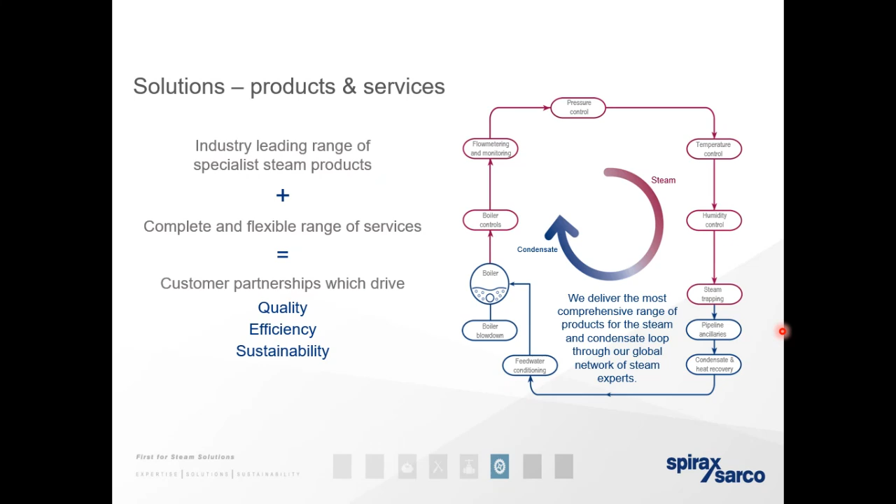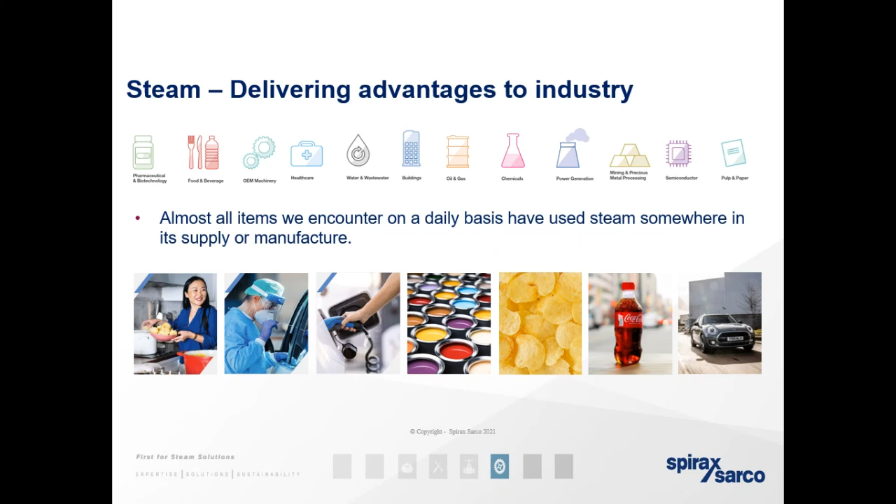Steam delivers advantages to the industry. There are multiple uses for steam in every single industry: pharmaceutical, food and beverage, OEM machinery, healthcare, waterworks, buildings, oil and gas, chemicals, power generation, mining, semiconductors, and pulp and paper. The pictures just represent a slight indication of these industries. Almost all items we encounter on a daily basis have the use of steam somewhere in the supply chain of the manufacturer.

What is wrong with plant steam? Well, nothing for most industrial applications. But plant steam is increasingly becoming unacceptable due to boiler feed chemicals, pipeline scaling, rust and corrosion particles.

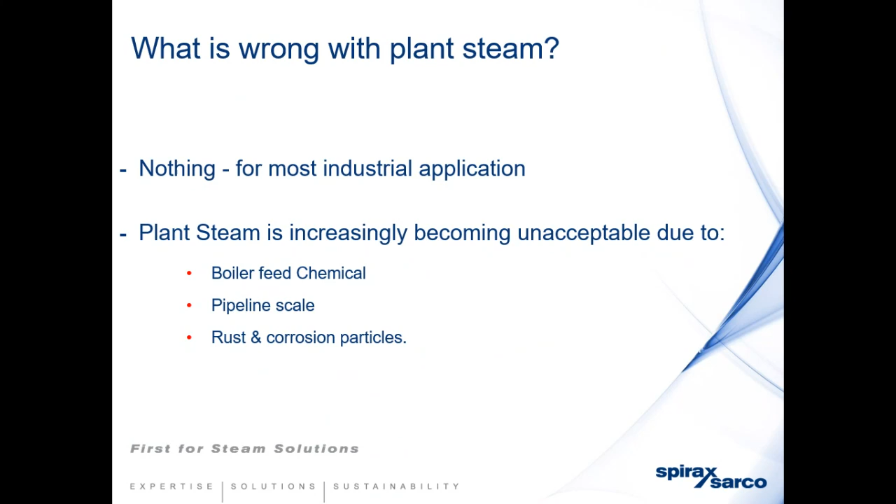It's especially this that we want to talk to you about today, about understanding the quality of the steam and where it's been used in your processes, and why plant steam is used in the processes.

Sorry, I don't know if you can see the pop-up that sits in the middle of the screen. Can you assist me, Francisco? What can we see at the moment? Yes, we can. Can you just close it? I'm trying to, give me a second. Or move it to the one side. There you go. Sorry about that.

Why use steam? It's still the most efficient, cost-effective way of transferring heat in all industries. If you consider the controllability of steam, it's very controllable. The temperature and pressures are related to each other, so it's accurate and repeatable in the operation of your systems.

Steam is a proven sterilizing process. Because of steam's capabilities, it's a very good option for that. Steam fills heat transfer space evenly, ensuring consistent quality because of its controllability. Steam is ideally suited to clean and sterile products and environments as it is inherently sterile.

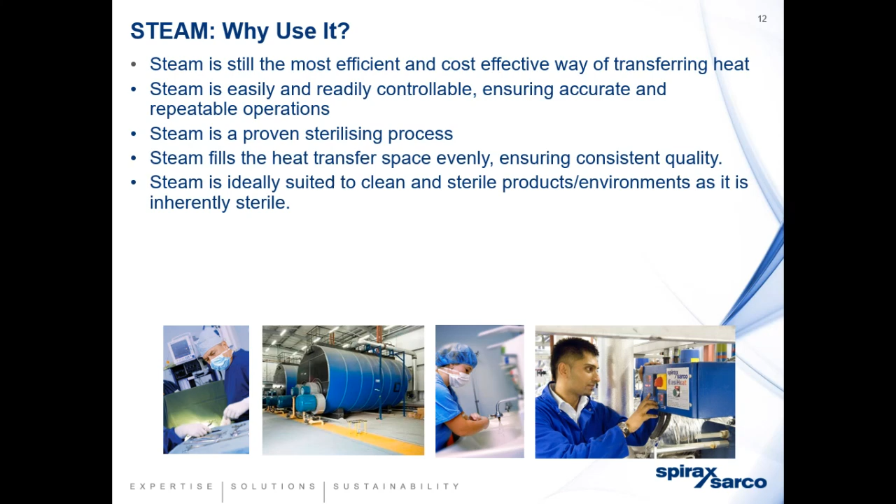Steam is extremely flexible as it can be generated in a central boiler plant or localized boiler, whichever suits the application. That means I can transfer the heat over quite a considerable distance and still be very efficient in getting the necessary heat at the application.

Steam is non-toxic. Due to the qualities of water, it brings a very fast-acting destructive power against microorganisms.

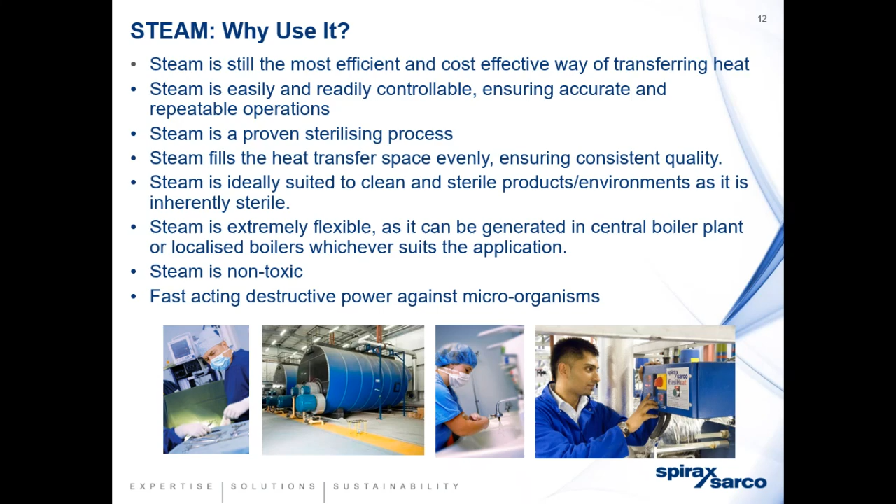We now move to the origin. If you remember the steam boiler loop, the steam loop, we start at the boiler, and that's where it's important to understand what steam you are actually allowing to get to your plant.

What happens in steam boilers? Priming: boiler water being carried and forced from the boiler to the steam and condensate circuit is a problem if it is not understood correctly.

Foaming in the boiler allows unstable water conditions, forming raw water issues, chemical issues, and poor control. In other words, if the pressure drops in the boiler and it operates below the actual design pressure, you are going to get foaming and therefore carryover.

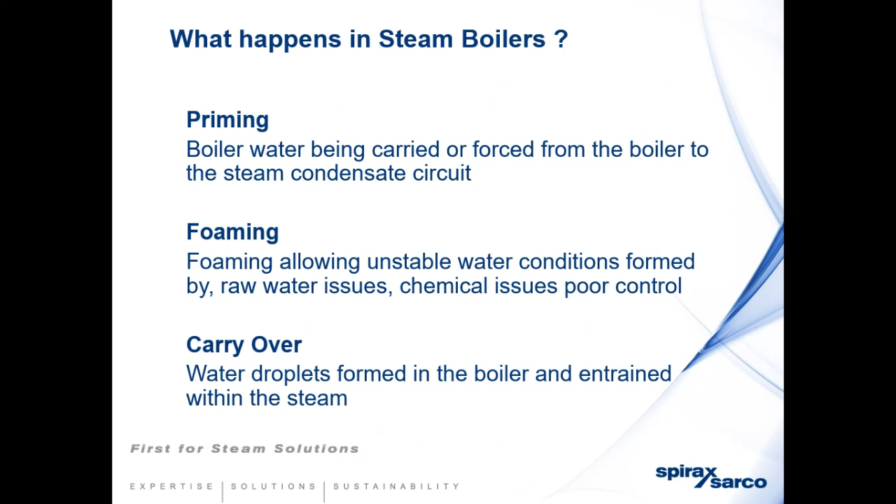That means water droplets formed in a boiler, entrained within the steam, will be drawn into the steam system, which means that the energy you will be carrying to the actual plant where the steam is going to be used will be less than at the saturation point of the steam.

So let's talk about priming. It's a sudden draw of boiler water into the steam takeoff. It's generally due to one or more of the following reasons: incorrect selection, installation or maintenance of raw water pre-treatment plant, operating the boiler with excessive high water levels, operating the boiler below design pressure, or increasing the volume and velocity of the steam released from the water surface.

Sudden excessive steam demand will cause priming to happen.

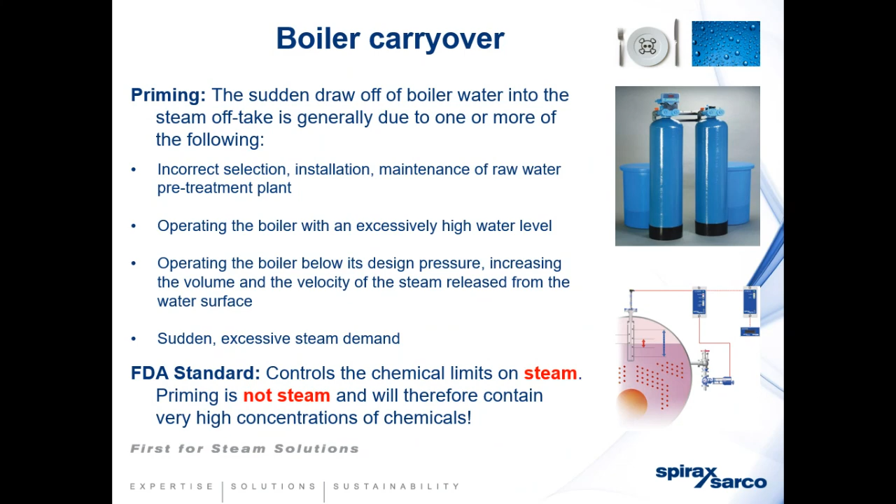And how do we prevent it? FDA standard: control the chemical limits on the steam. Priming is not steam and will therefore contain very high concentrations of chemicals. So understanding the control of your boiler is of utmost importance to start the energy journey.

Plant steam contamination includes volatiles, substances that can be carried over into a gaseous state, chemical substances like mercury, cadmium, lead, chlorines, chlorides, and boiler feed water chemicals, which can cause harm to human health or steam systems, especially if you have direct injection systems in your plant.

Biological contamination, including bacteria, fungi, viruses, and yeast, is present in water sources and controlled by local water authorities, and is of concern in the production of medical devices and products which could bypass the human body's natural defense.

An example: injectables. High temperature of steam will kill most of these, but in doing so can cause harmful pyrogens happening in the system.

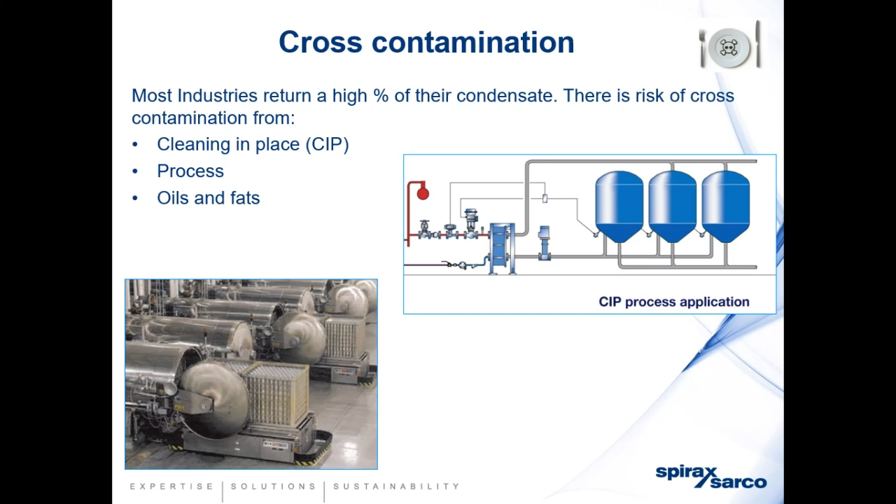Also with your processes, with normal heat exchangers, where gaskets fail on plate heat exchangers, some process chemicals or process elements filter through to your condensate return, and for the same reasons, oil and fats. This all goes back to your boiler, causing cross-contamination.

Here's an example of such a situation.

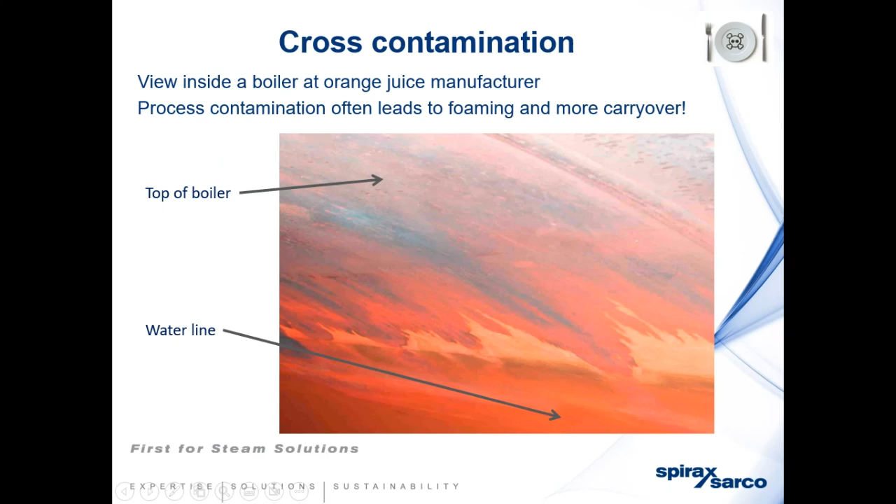This is a view inside a boiler of a company that manufactured orange juice. Here you can see the process contamination goes back to the boiler and causes a lot of foaming. As you can see, the top of the boiler here and a water line down below, causing foaming, and therefore that foam being drawn back into your steam system.

Okay, Johan, just one question. It seems to be a comment, but I think it's worth confirming: if we feed boiler quality water, there's still chances of various contaminations in the steam.

Yeah, obviously we have to understand the total dissolved solids. Maybe Francisco can also assist us with some better insight into that.

Yes, if I can. It's a good point you've mentioned there. The boiler feed quality is inconsistent in order, and that's why you will see later in the presentation where Johan refers to getting that consistency of steam quality into your process. Because of the variations and variables that contribute to contamination within a normal plant steam system, when used directly and indirectly into your process, the only consistency one can get is to generate clean steam, and I think that's covered in the presentation further down. If that's not clear further down, let us know and we will explain in more detail.

Thank you, Francisco. I hope the person that asked that question, Cornelis, if that answers his question, he can just let you know as we go along in the presentation. Yes, and thank you again for posting the first question. We really appreciate the questions. I think this is the engagement that makes these webinars worth it. So if you feel the question hasn't been answered properly, please don't hesitate to repost or ask a different question. But thank you for your engagement, we appreciate it.

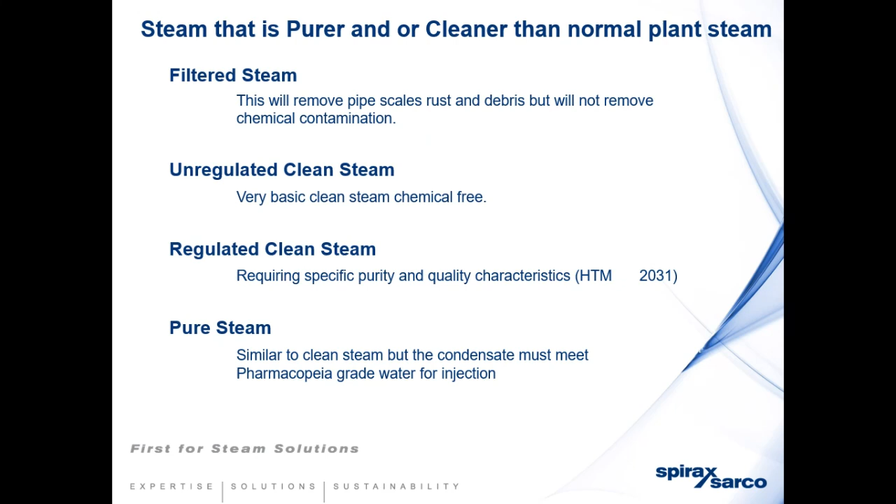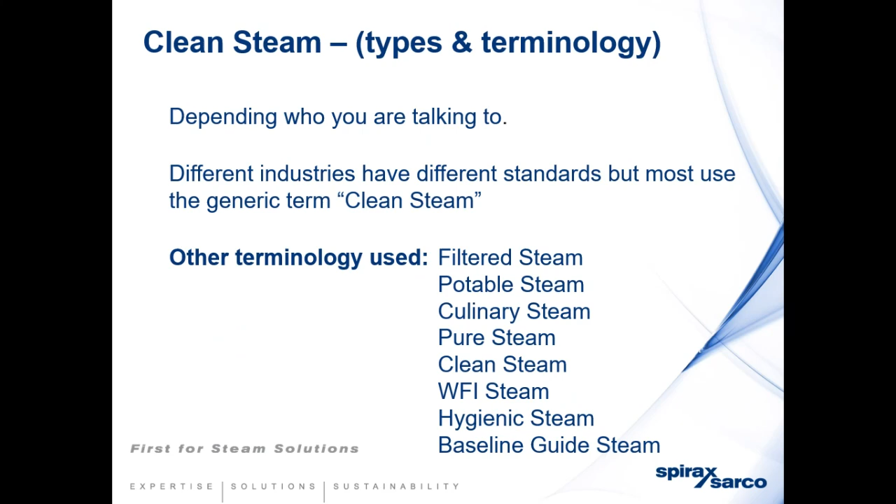So depending on who you talk to, different industries have different standards, but most use the generic term clean steam. Other terminologies used are filtered steam, potable steam, culinary steam, pure steam, clean steam. We would like to clarify how steam is looked at from different grades of use, and to what extent the steam is clean.

Filtered steam is the most common in the food and bev industry, particularly by American-owned and influenced companies. Clean steam may be used in hospitals, medical supplies, fine chemicals, and electronics, and now in the food and bev industry.

Now, if you just refer to the food and bev industry and clean steam, let me make that connection. Imagine you have a process where you're using the steam to heat the process, but it's directly injected. Just think about it, that steam, because you're directly injecting it into your product, becomes part of the product as an ingredient. Now think about how stringent you are about water that's pre-mixed in your ingredients and all the other ingredients that go into your product. So steam now becomes part of that.

Pure steam is used by pharmaceutical, biotech, and electronics industries. It has a much higher level of standard in securing that the steam contaminants are understood to the extent required.

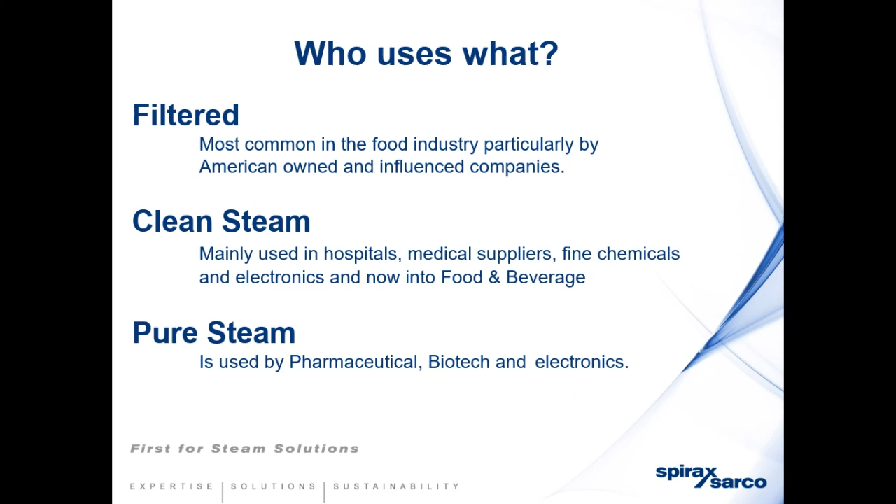So if we look at filtered steam, where it sits on the hierarchy of steam quality or purity - first we spoke about plant steam, which is pulp and paper, petrochem, distilling processes, laundries, HVAC. Now we're looking at food and beverage as part of filtered steam, and then at a higher level is clean and pure steam.

Filtered steam is often referred to as culinary steam in a plant - steam that has passed through a fine stainless filter, typically a 5 micron filter. A 5 micron filter element is designed to remove 95% of all particulates larger than 2 micron. This is acknowledged in the USA as being acceptable for culinary steam when used in conjunction with the FDA chemical standards.

Now, it's important that we understand the chemical standards for the boiler treatment and the water. A lot of us refer to the boiler chemicals as being food grade chemicals. But the key is that to meet that food grade standard, there is a concentration of those chemicals that needs to be met. If you exceed that concentration, although they are rated as food grade, it's no longer a food grade chemical in your steam system.

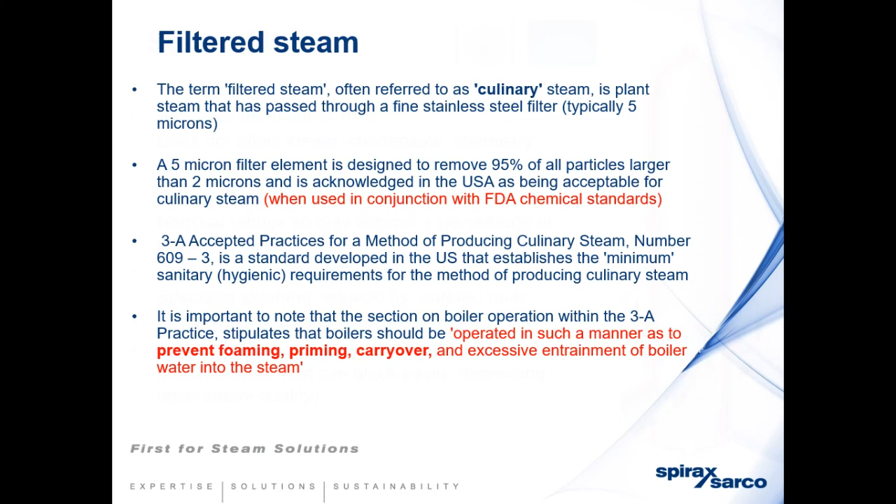Now let's look at the filters that we put in line. Steam filters remove particles only - solids - they do not affect the steam and condensate chemistry, and are not designed to remove moisture. The element can be 1, 5, or 25 micron elements, with a nominal rating, so they only remove a percentage of particles, 95 to 98%. It's a sintered element, for finer particles. Specialist cleaning is required for sintered units, and understanding what those requirements are is very important.

Francisco, can we stand a bit still on that and elaborate a little bit on that specialist cleaning requirement for sintered units?

Yes, obviously the filter is there to take particulates out - that's basically all it does. And then obviously some excessive scaling and carryover forms scales, which then tends to block the filter.

Now we get asked a lot of questions - how long will a filter last within a system? That's very difficult to tell. It depends on the actual control measures of your boiler and the management of the boiler to the actual point of use, which then has variation. So therefore you can never guarantee an element would last you either 2 months, 4 months, 5 months, or whatever.

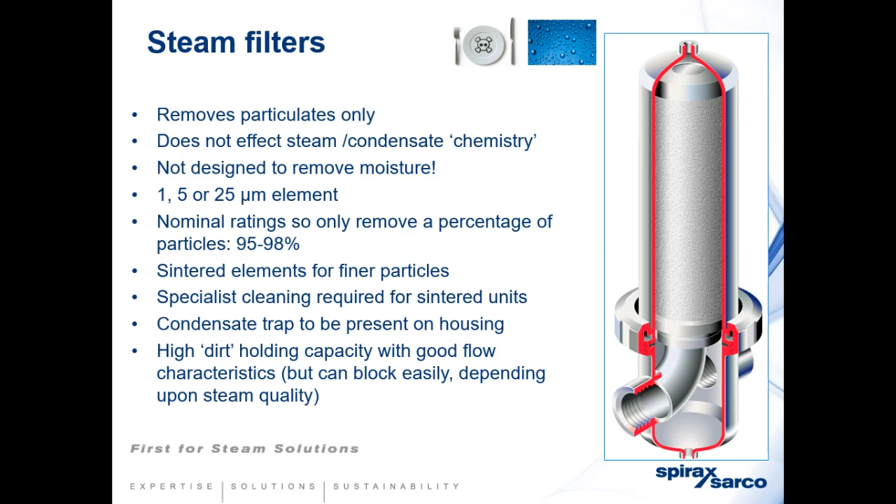High dirt holding capacity with good flow characteristics, but it can block easily depending on your upstream steam quality. It is important that these things get monitored so that we get the highest efficiency from this.

Now let's have a look at a 5 micron filter, which is generally used to remove particles larger than 2 micron, but it's not designed to remove water or chemicals from the steam system, for example the carryover we're referring to from your boiler.

To the left of the line is what will actually go through, and to the right is what will stay behind. Just a few things for indication: gelatin, starch, sugar, virus has the capability of going through, paint, pigment, these protein enzymes. What will stay behind is red blood cells, pollen, human hair, coal dust, mist, yeast cells, beach sand, and on the bacteria scale there's some that will go through and some won't.

Just to give you an indication at the bottom, of which process you would actually need to remove the particles on the left that are possible to go through the filter, and at the extreme end is reverse osmosis.

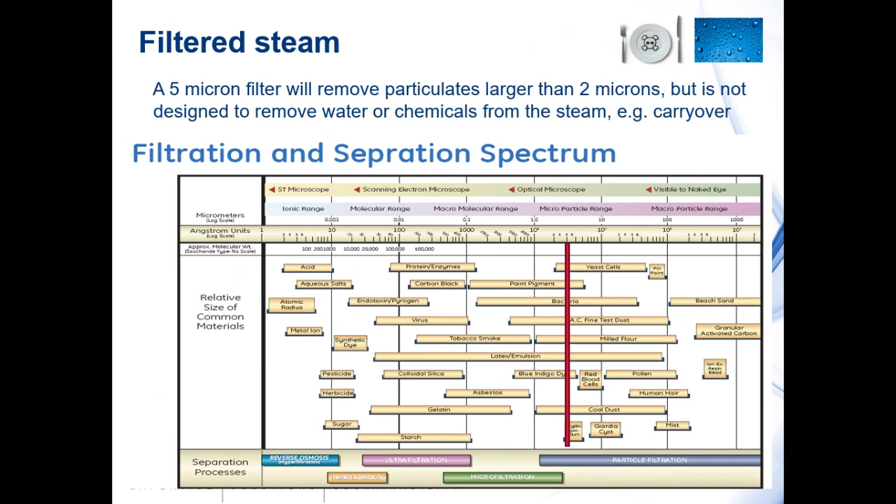So, filtered steam - this is a setup for your filtered steam application. If you look at the main steam line coming in from the left, you have your stop valve at number 2, number 3 the strainer, and then you go to your separator and the condensate trap, pressure gauge.

But once you start going past the filter, it's very clear and understood that what needs to happen beyond point 11 needs to be stainless steel, to maintain and not have scaling or anything like that getting back into your system. So from the filter onwards needs to be stainless steel, to secure that whatever you've removed with the filter will stay out of the system.

There's a question there, Johan, if you want to answer it. Somebody hasn't put his name on it, but it's also a good question for everybody to know. It says: how do you ensure the filter doesn't affect the steam pressure downstream?

Well, the only way to ensure that - that's why a lot of industries, if they are very critical, as I said previously, the only way to get that consistent steam quality and pressure is clean steam, and that will be covered further down in the presentation. There is no way to ensure that the filter doesn't affect the pressure. It will affect the pressure downstream, because a filter is there to block any particulates or any carryover or anything that comes through in the system, so that will block it, preventing it from going into your process. So it will always affect the actual steam pressure, the downstream pressure.

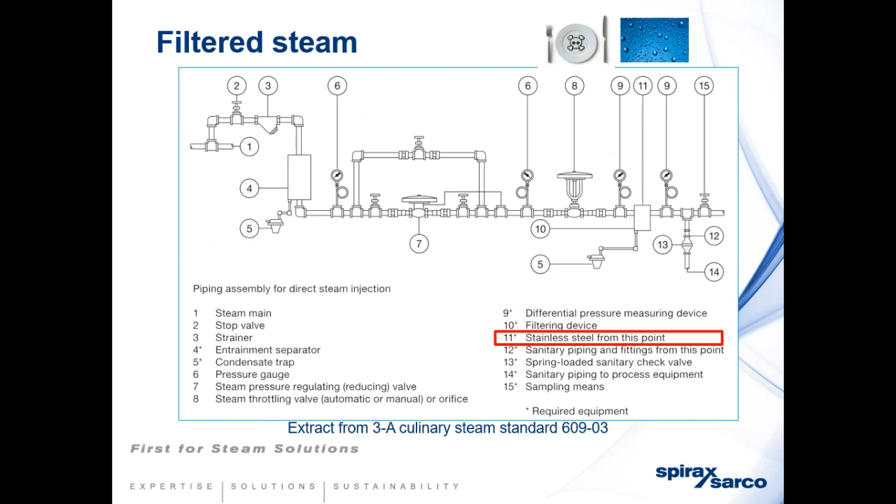Now HACCP, which applies with the EU legislation, the 852, tells you the direction one should take, and one of them is applying a HACCP. Here it is. Do you want me to continue with this?

Yeah, as you are. Just to inform our audience, Francisco, our expert in this area, has also helped write some white papers as part of the standards. So feel free to ask Francisco any questions around that. He is absolutely an expert on the cleanliness and control of steam.

Over to you, Francisco. I'm going to ask you to change the slides as we go along, because I haven't got control. Okay, yeah, just leave it on that one for the moment.

Right, as I've explained, what is HACCP? Well, there's legislation and guidance, and it tells you that if you know there is a possible contamination that can occur within your process, then you apply what we call the HACCP principles.

Now, we do HACCP audits for a lot of companies. We get asked to do these HACCP audits to try to analyze where are the risks to the current processes. And what we do is we produce a confidential report with the actual risks and also the solutions to overcome those risks.

Now you can contact Johan if you are interested in something like that. It'll probably help you, and that will be a very good first step to start analyzing your current risks at the moment.

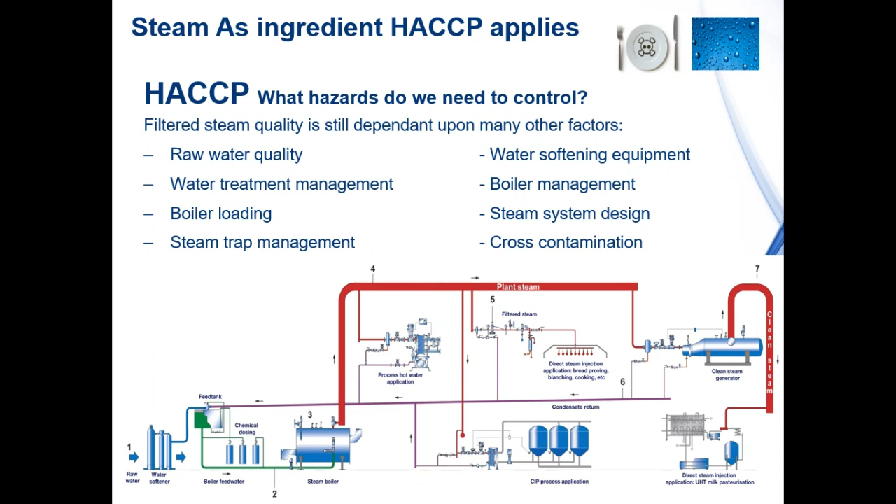You want to go next slide? Okay, what does it do?

As I said, it's steam checks that you do, but because the steam changes every second, it's very difficult to control the actual HACCP control measures you need to put in place. If you take a sample of the steam now, and then five minutes or even four seconds later, it'll be inconsistent - it'll be different again. It varies because of the variations of factors upstream and downstream of the filter. Whereas if you go to clean steam, because of the water quality going into a clean steam system, which we'll talk about, it is consistently the same all the time, and therefore you have the consistent steam quality your process requires.

Next slide. I can't see that well.

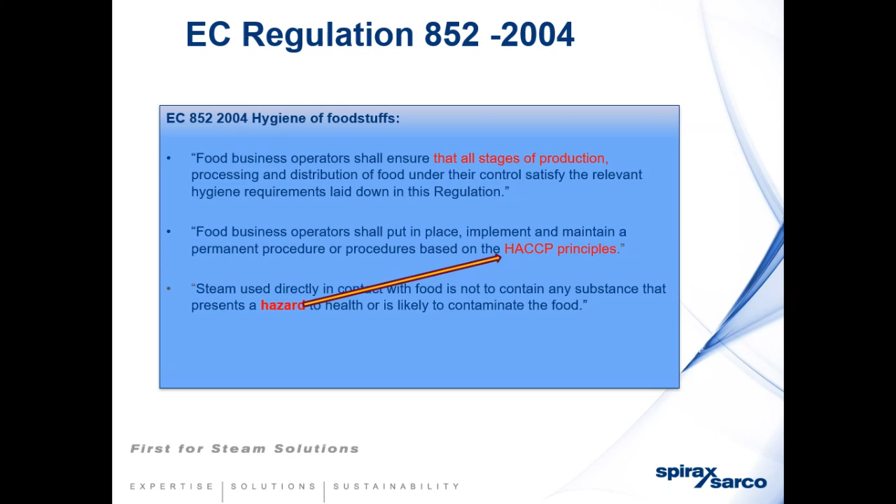This is a regulation that applies normally across the whole of Europe and in all international companies. As I said, if you follow this regulation, the 852, which has been in place since 2004, it's implemented because there have been issues within industries. A lot of people say, well, we've been running like this for 35 years and never had a problem, but there has been. The chance can be - who's going to take the risk? Who's going to take that responsibility to say we are risk-free? Nobody wants to take that challenge aboard, nobody wants to do that. Therefore, we've introduced a system that gives the customer peace of mind that the system they're using, directly injected into the process, is free from any contaminants. By applying that, that's what we call clean steam.

Do you want to continue that, Johan? No, you can carry on, Francisco.

As I said, the only method that we or anybody can give the end user guarantees that steam will not be contaminated in any form is to apply what we call clean steam. Now there's a lot of confusion out there about what is actually clean steam. A lot of customers ask, do you have clean steam? And they say yes, we've got it. I ask, what type of generator do you have? They say, no, we've got a filter.

A filter is not clean steam. All the filter does, as Johan was explaining, is take particulates out there - rust particles or whatever larger than 5 microns - and captures it in the filter. But if you have excessive chemical carryover, or other contaminants within the steam line, that will find its way through the filter into your process. Johan was talking about condensate return - a lot of the condensate in an industry like yours gets returned back, and that carries a lot of contaminants. Now if you apply what we call HACCP, one of the HACCP control measures would be to actually clean out the feed tank to the boiler.

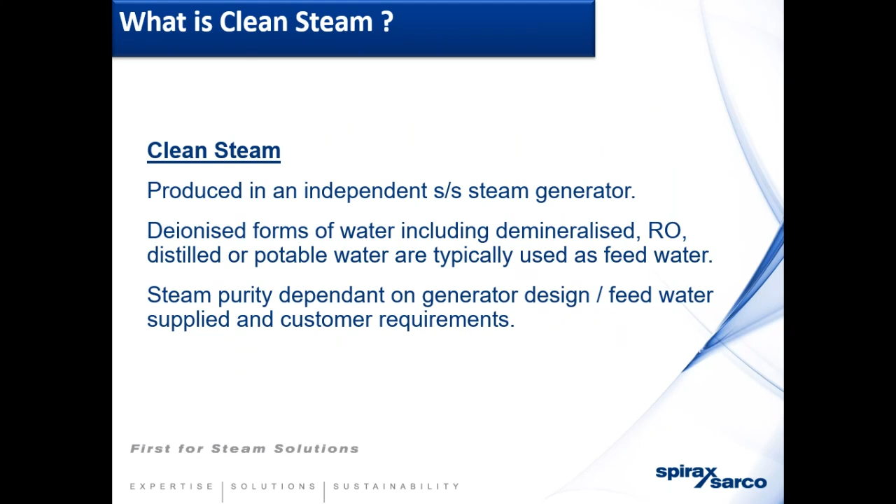And later on we'll have a P&ID on how clean steam generates, so you can understand that better. Now, clean steam is the only guarantee that one can actually give you to have that consistency. The clean steam and the condensate from the clean steam never get returned to the clean steam generator. Why? Because there is a risk of contamination. So therefore, you return that to the boiler.

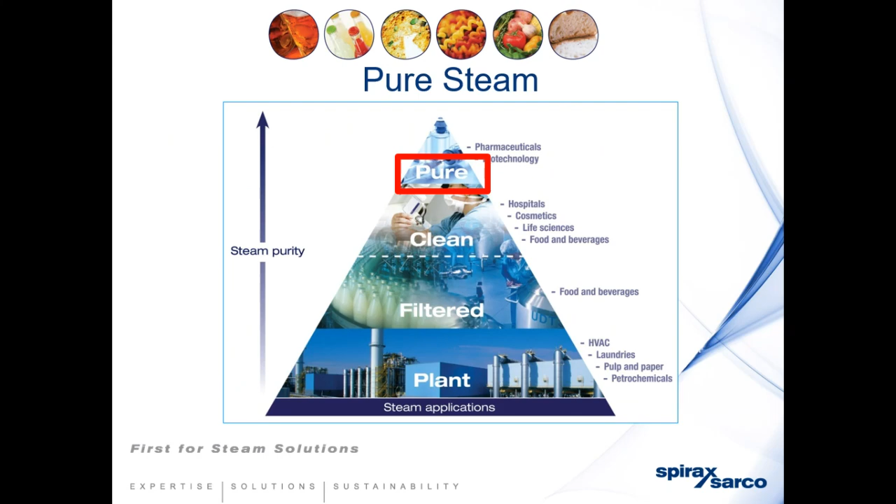Now, we always want to clarify this. As you can see on the triangle, you have filtered, clean, and pure. There's a lot of people, when you ask them what type of steam they have, they say, our steam is pure. No, it is not pure. There's different angles that you need to understand.

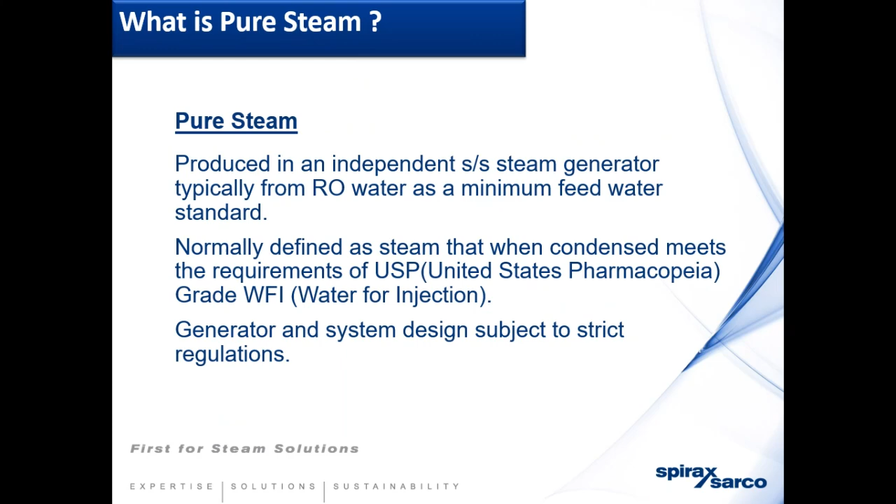And we like to mention this, even though it's not relevant to the actual food and beverage industry, but it's very important that you understand that there is one higher than clean steam, and that is pure steam. Now, pure steam doesn't apply to the food and beverage industry at all. It is pharmaceutical, and it's very legislated. So therefore, it applies more into that industry.

That's why, wherever you manufacture tablets or medication, you know that the steam is consistent at all times, whether you do it in South Africa, Japan, Europe, wherever, because of the legislation requirements that follow through in pure steam. Now, the food and beverage industries are actually doing the same thing, and they call it clean steam, which is steam that is chemical free and will not be able to contaminate your processes. Is this clear for you now, Johan?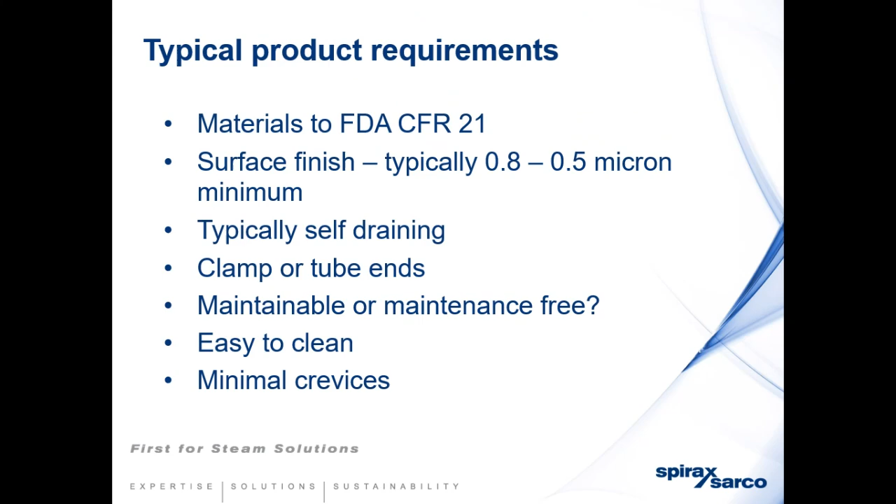Yes. Okay, look, a lot of those standards you see there are standards that we generally use, whether it's food, hospital, or pharmaceuticals. Now, when you want to qualify any product that's actually in contact with food, it has to obviously be stainless steel. There is, next slide, some legislation requirements that you need to understand.

These are just some applications you can see on the screens which are used directly with steam in contact with the process. They may or may not follow your manufacturing process, but just to give you an indication, there's lots within food where steam is directly in contact.

Now, I also would like to cover this. If you take, for example, a can of tomatoes, and steam is part of that process, directed into the actual process, you will see there's a label on the can which clearly identifies the ingredients used within your process. Now, by right, you should identify or declare that the steam, because it's directly in contact, carries ingredients, in order to actually be safe within the process.

And therefore, using clean steam, as I said before, it doesn't have to be declared because the steam has got nothing in it, and therefore it doesn't have to be declared. Next slide.

Francisco, can I just add to what you've just said?

Yes. A lot of the time we might not blow steam directly into the product to mix or heat, but a lot of capper machines utilize steam just as a blow-off before the caps of some containers are fitted. And understand that steam then also comes into contact with your product. So even at the very last stage of manufacturing, steam can become part of your product in the container. So it doesn't necessarily mean steam has to be blown directly into the mix while mixing or heating — it can also be at the very last stage at your capper machine.

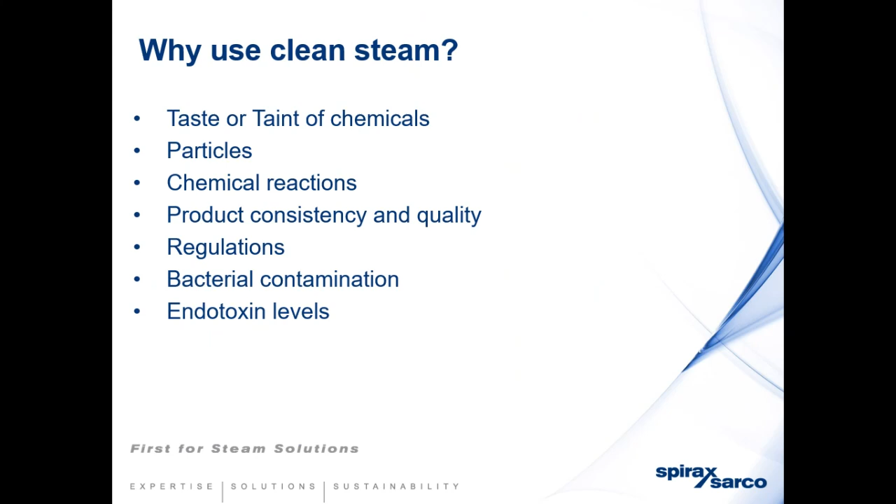So these are the contaminants that occur, and the major one we mentioned today is the taste and taint, which is causing a lot of product issues and product recalls. Next slide.

Product and quality, purity standards — this is where you really excel, Francisco. As we said before, steam quality commonly refers only to the amount of water in the steam. So the dryness fraction equals the mass of the steam, and the mass of the steam plus the entrained water equals the dryness fraction.

So, Francisco, how do we quantitatively measure steam purity? This is interesting, and I'm glad you've put this slide up now. When we talk about steam quality, we must understand there are two things: the health and safety side of steam quality, and the food safety side of steam quality. Now, we haven't really spoken about the health and safety point of view, because when we talk about dryness fraction, a lot of people you ask don't know what their dryness fraction is, or what the wetness of their steam going into the process is. A lot of people don't know that.

Now, Spirax has invested a lot of money in this subject, where we can actually measure your steam quality and understand your steam dryness. The benchmark in industry for any process, in terms of health and safety and food safety, is that you need to achieve around 95%. If you don't know what your dryness is, talk to us and we'll come and put our equipment in to measure it. If your dryness isn't 95%, we can provide solutions to help you sustain that value, because inconsistency in your steam's dryness will vary your process conditions as well, since wet steam changes temperature and can add extra unnecessary ingredients into your process. So it's best to understand or have a benchmark — talk to us and we'll discuss that.

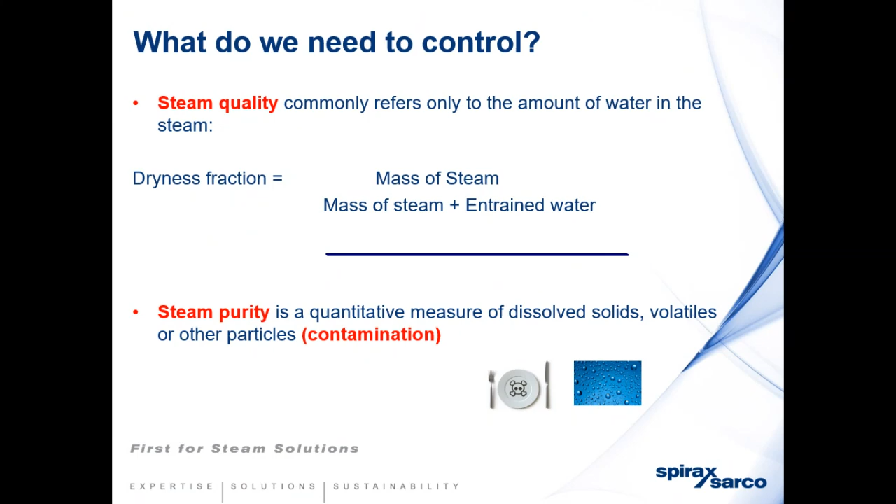Steam purity is more about the carryover, the chemical content, and the substances in the steam that we cannot control, or can only manage to some extent. That's why we strongly recommend, if you need guarantees on purity, going with a clean steam system or a chemical-free system, which gives you peace of mind that the purity is consistent at all times.

When we talk about quality, we reference the non-condensables, steam dryness, and superheat. Non-condensables are just as important, both for protecting your equipment downstream and for your process. If you don't remove the non-condensables, what happens?

You get excessive corrosion within your system, which starts to contaminate your process even more. So let us come and assess your steam quality to understand your non-condensables. We'll check the steam dryness to establish a benchmark and take measures to ensure consistency of non-condensables, superheat, and dryness in accordance with industry standards. There's a lot of mechanical correctness required upstream and downstream to meet that consistently.

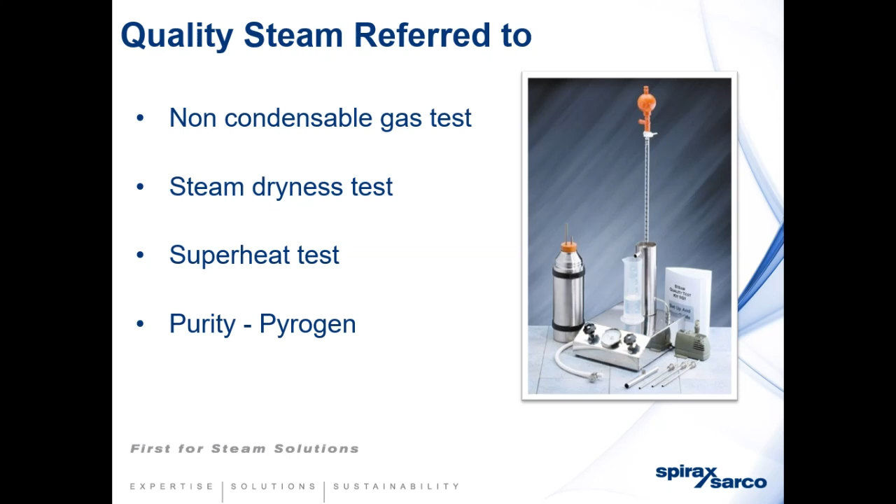The mechanical correctness of the system matters, and a lot of people try to compromise on the system and cost. There are two things we need to understand: the food safety risk to the food, and the health and safety aspect, which is just as important. That's why you need the right mechanical correctness of your steam system. Do not compromise on it, because ultimately either somebody's going to get hurt or you'll get repercussions from contamination in your process.

Let's quickly cover legislations and guidance. These legislations and guidance exist to help make sure that what everyone is doing is safe for human consumption, and not just that—they're also relevant for animal feeds and similar processes.

The same applications apply. There are two pieces of legislation I'd like to cover now—if you click on the slide, yes, and the next one.

I know the 1935 regulation may not seem to reflect South African content, but let me explain: if you're producing food within a country outside the EU and exporting to the EU, then 1935 will be applicable, and you need to use that 1935-2004 legislation. That legislation is not a nice-to-have, it is mandatory.

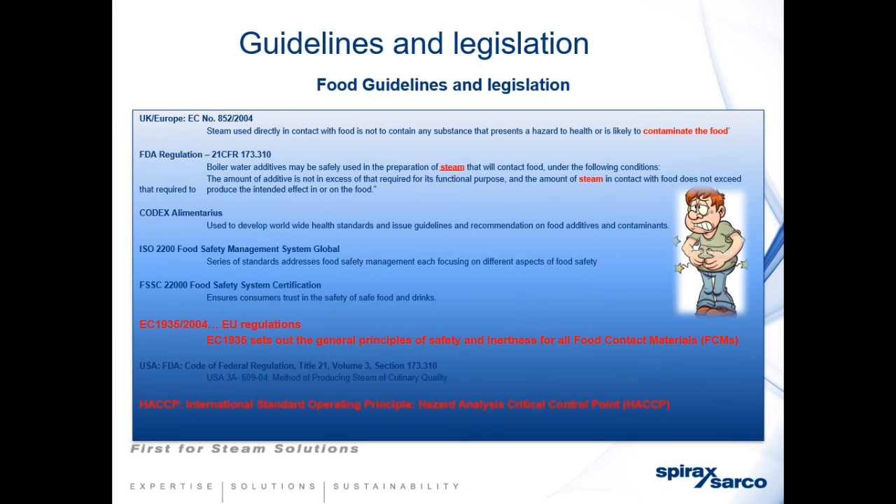Okay, so Francisco, the next part is water treatment, as we start with the water that gets put into the system. So if you can elaborate a little bit for us on that. What's interesting, I like to explain this: the water is the major commodity out of the whole system, because if your water feeding a particular boiler or generator is contaminated, then it makes all sense that the rest of the steam is contaminated.

One thing around clean steam, you must understand the water going into it is removed from all the chemicals within the system. Therefore the water is not contaminated, so it cannot contaminate the clean steam system. But you also need to understand that the clean steam system or generator is manufactured in accordance to food grade standards.

So all the food grade standards are applicable, like no crevices, no dead legs. The seals and contacts all have the certification requirements that you need to qualify as food grade equipment. So it all qualifies into that category, not just the actual water going into it.

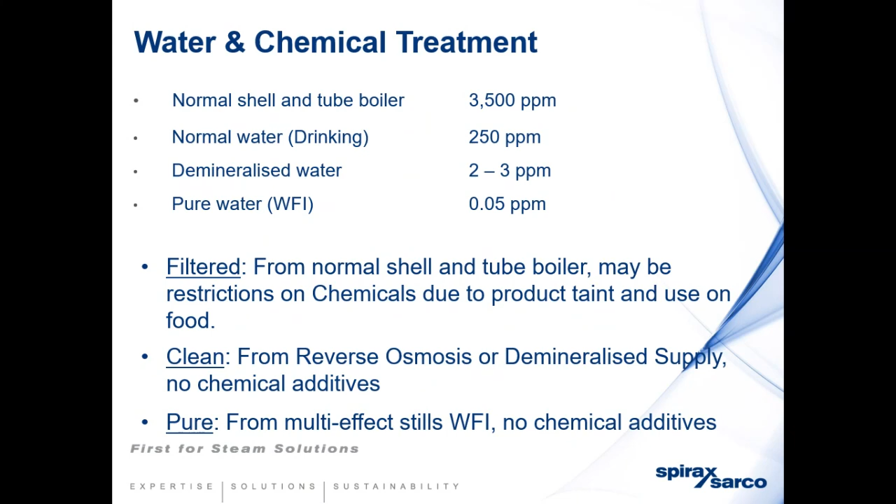But if you take, for example, dirty water and generate steam in a clean steam generator with dirty water, then you're going to get dirty steam out of the generator, because it'll contaminate the actual generator. That's why it's important to understand the water is the main commodity for generating that steam quality into your process. Next slide.

This is just to give you an indication, as I think Johannes covered it in his presentation on the previous slides, where even though your steam or the chemicals used within the steam have to be food grade, there are limitations that you cannot exceed.

Now, as the question came up from Vincent about the chemical, it is very difficult to have a measurement today to measure your chemical carryover, your chemical resolution within the steam system, because there isn't any system that can measure that continuously. So therefore, to have peace of mind, again, you use a chemical-free system to eliminate that contamination of food. Next slide.

These are just the legislations we were discussing, because it clearly says in the guidelines that if you know there's any additive or anything in the steam that can possibly contaminate the food, then you need to apply what they call the HACCP principles.

And you need to understand that, whether we like it or not, an existing conventional steam system will contaminate, it's just a percentage of contamination that will occur. Somebody has to take the risk, somebody's going to say we can live with that risk. If you can live with that risk, then it's fine, you continue doing what you are doing.

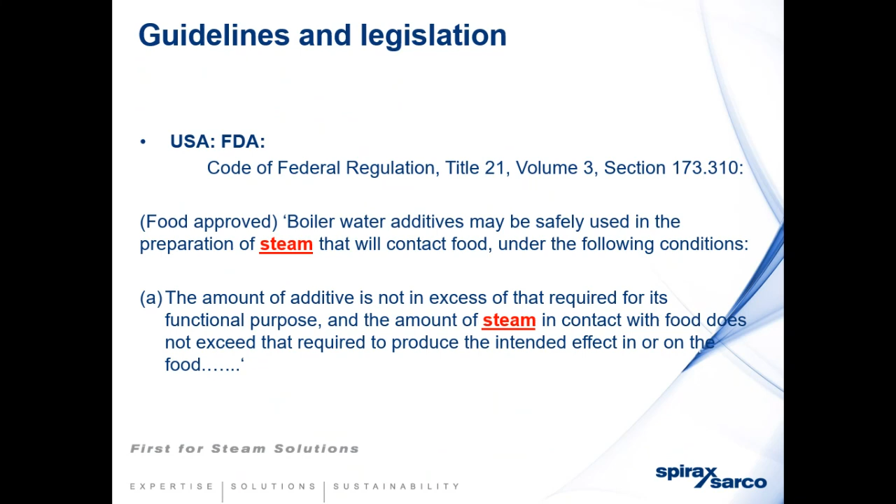But if you want to eliminate the risk, there sadly is only one solution that one can apply in that system. And this is where these legislations come in, to give you that guidance, if you know there are systems today that can actually prevent you from contaminating your process.

This is just to show you some of these chemicals on the left, to show you the limits not to exceed. For example, the very first one, do not exceed 10 parts per million in the steam.

Now, it is very, very difficult to control that. In part, it's probably not possible to control it. How does it work in a steam boiler? Well, you've got dosing pumps in a steam system, and your dosing pumps will dose into the actual feed tank to accommodate whatever resource you're using, whatever the chemical is. It could be an oxygen scavenger, a corrosion inhibitor, various chemicals you use.

Now, just to give you an indication of how difficult it is to control that limitation: once every 3 weeks, a chemical guy comes and checks your water treatment within the boiler, and he suddenly says, well, we need to raise the oxygen scavenger chemical slightly more because we found it needs more. So what he actually does is increase the dosage of the pump. Three weeks later, he comes back and says, I think we overdosed the system, we now have to turn it back. And all he does is turn the dosage a notch further back, from 3 down to 1, showing you the inconsistency.

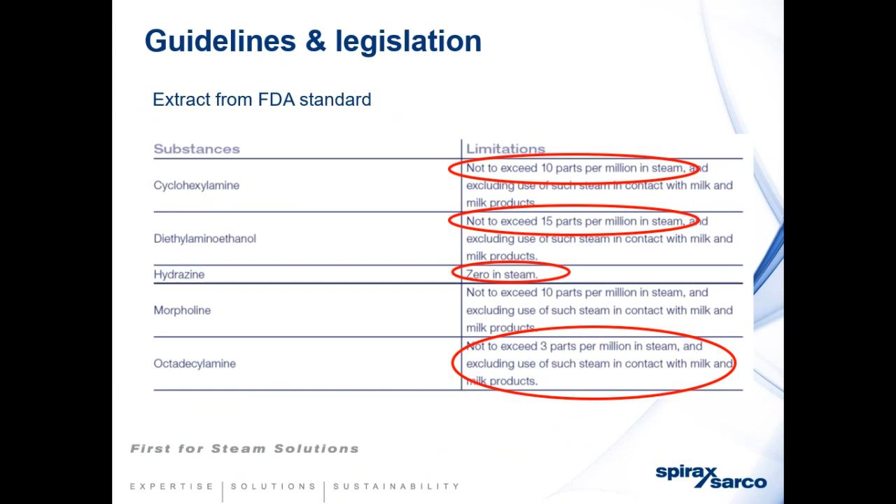Where's all that excessive chemicals gone? Well, it's gone into your system. That's why we developed what we call a chemical-free system, to prevent those issues from happening, or those risks from occurring in your process. Next slide, I'll talk about the different types of water treatments there are.

The one I'm going to concentrate on today is reverse osmosis, which works in conjunction with a clean steam generator. What the reverse osmosis does is remove all the chemicals, odors, smells, and tastes from the water before it goes into the generator, which generates chemical-free steam to your process.

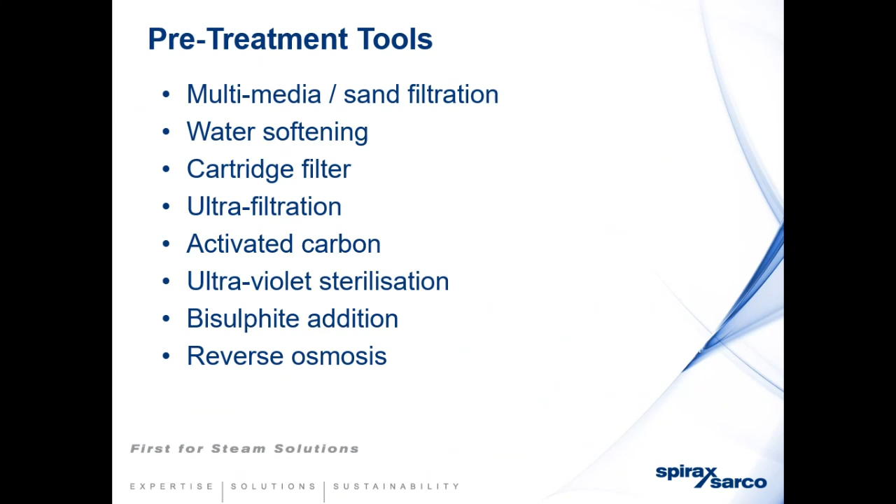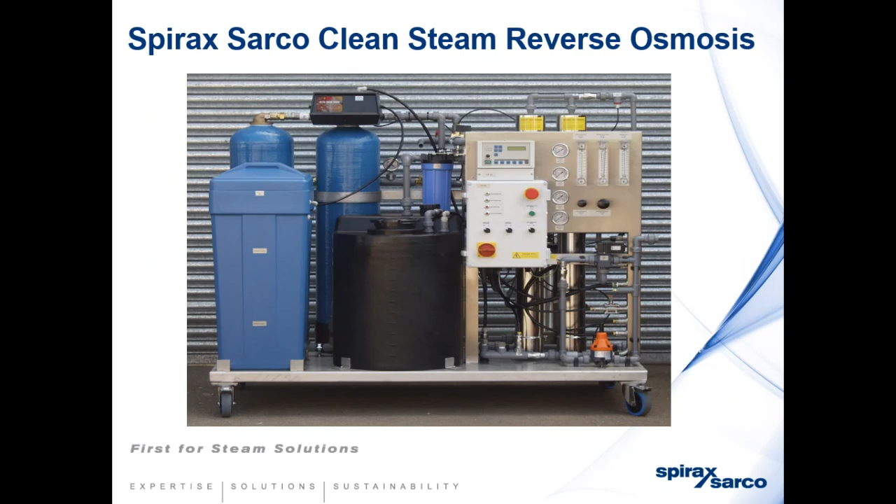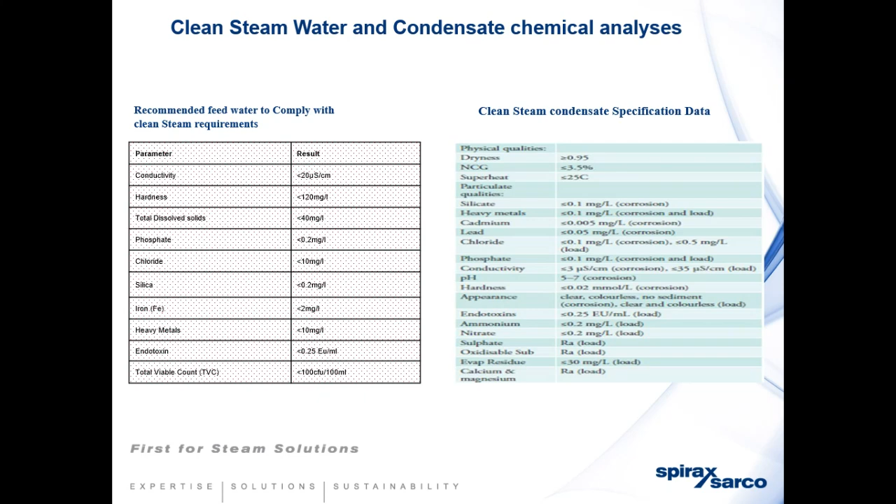A lot of industries don't check for all those. The other one at the top is the quality - the dryness, non-condensable gases, superheat we were talking about - which we come and measure using those benchmarks. If those benchmarks aren't achieved, we change the mechanical correctness of your equipment to make sure you can reach those quality standards.

Materials of construction, next slide. It's very important you understand, if you're using filtered steam, it's acceptable to use what we call 304 stainless steel, and everything after the filter has to be 304 stainless steel. If not, you defeat the object of the filter, because it's there to take any particulates upstream from the filter. If you're using a clean steam system, we highly recommend that anything in contact from the generator to the point of use

is all in 316L, and all the generators and solutions we provide would be 316L and certified to 316L. Water going into the generator, as I explained, has all the chemicals removed, so it becomes very aggressive and starts attacking any material lower grade than 316.

Next slide. Yeah, just on that point, Francisco, we talk about galvanic corrosion. So if we try to take a shortcut and incorporate some other metal - carbon steel, cast iron - into the rest of the system, introducing that material into a stainless steel system, or what should be stainless,

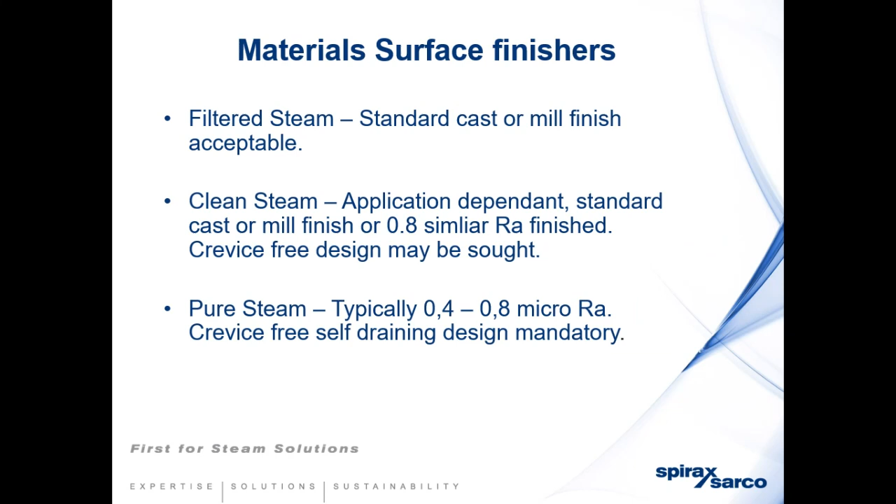Just to elaborate on the finishes: when it's normal filtered steam, there's no real standards in terms of the surface finish that's in contact with the process. When it comes to clean steam, there are some standards where they either mill finish, or sometimes people request a 0.5 or 0.8 micro RA, referred to as the surface finish. When we talk about pure steam, there's no way around it - you have to have 0.8 or less surface finish, but that's not applicable here.

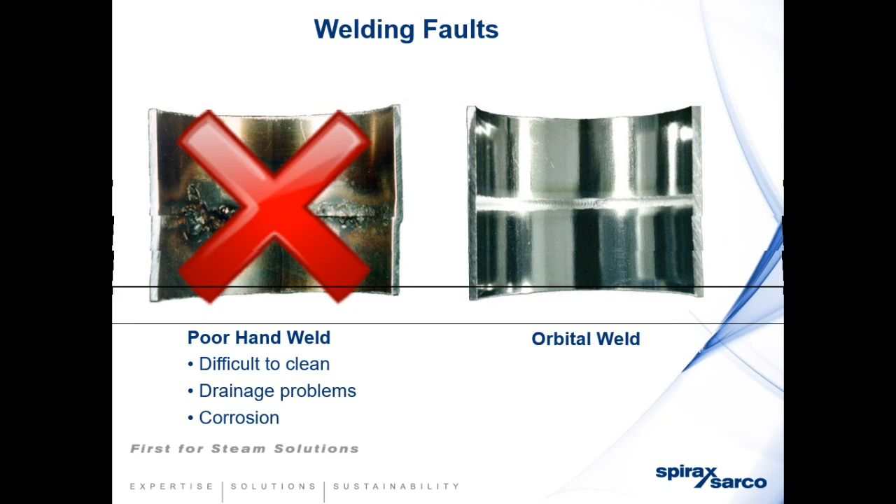Yes, some clean steam distribution methods and examples. You want to cover this, Johan?

Yeah, no problem. So in our system design, we need to make sure there are pockets fitted with a trap set, which consists of isolation valves, strainer, a Spiratec sensor, as well as the trap, your non-return valve, and then a further isolation valve.

Now, the importance of having a pocket is to allow rundown when the system stops - we want to drain all possible liquids out of the system. If we do not create this pocket, obviously there's not enough room for the water to collect in.

And then when you start up the system, what you see in the second drawing will happen - it will pick up the water and form a water slug that will cause big damage with water hammer.

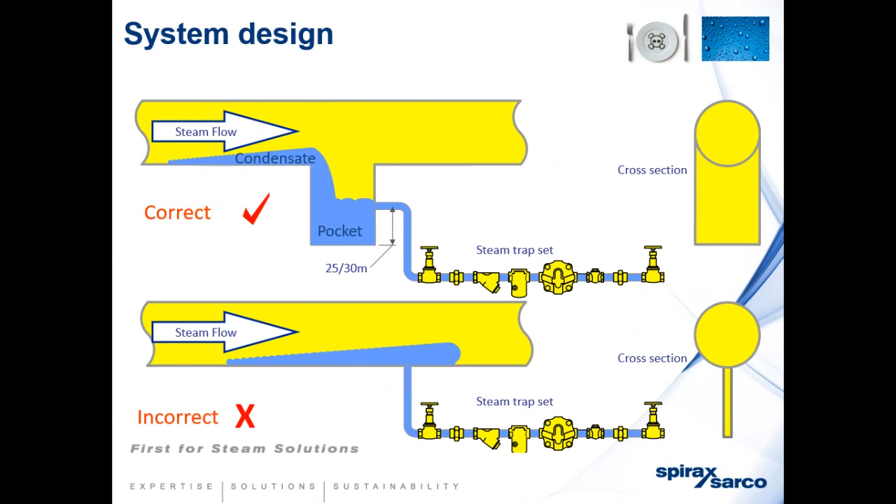Again, when you start up and the steam starts flowing through the pipes, it doesn't pick up that water to create a water slug.

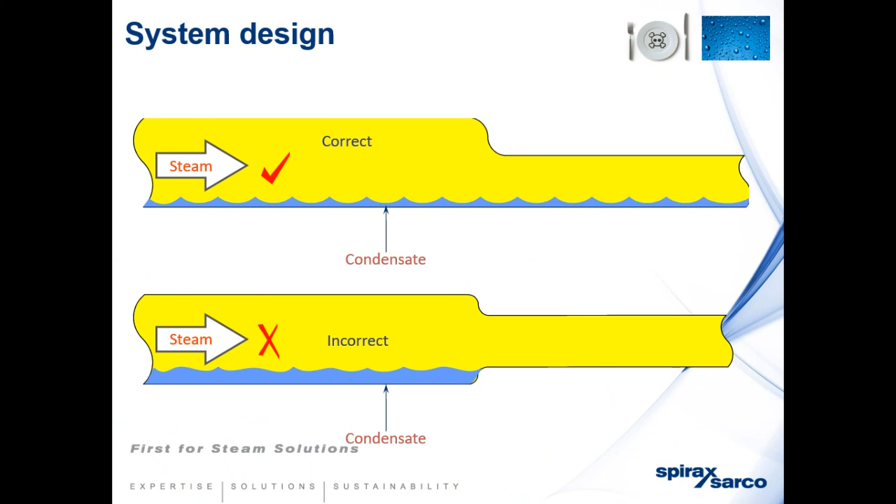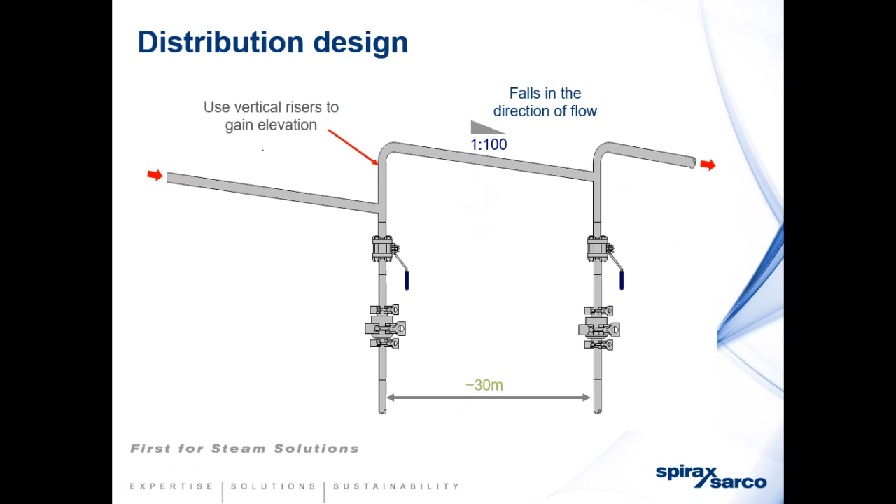The next thing is in your distribution system - when you're going uphill, utilize vertical risers to enable you to drain the water from the system the minute you shut it down, so that you don't have water in your system when you start up. The angle you need is a ratio of 1:100 falling in the direction of flow, and having them 30 meters apart is very important as a minimum standard.

Then distribution design - air can be present in the system due to ineffective degassing. As you start up after periods of inoperation, you need to have an air vent to get rid of these things, because air can act as an insulator, affecting sterilizing cycles and heat exchange. You cannot infer temperature from the system pressure, and air can influence corrosion. So air in your system is another gas sitting with steam that is not conducive to your system being very effective and efficient.

And then we keep referring back to sustainability - you pay a lot of money for this system, and the longer it can run for you, obviously is important, because it's a big investment that you make to the infrastructure of your factory.

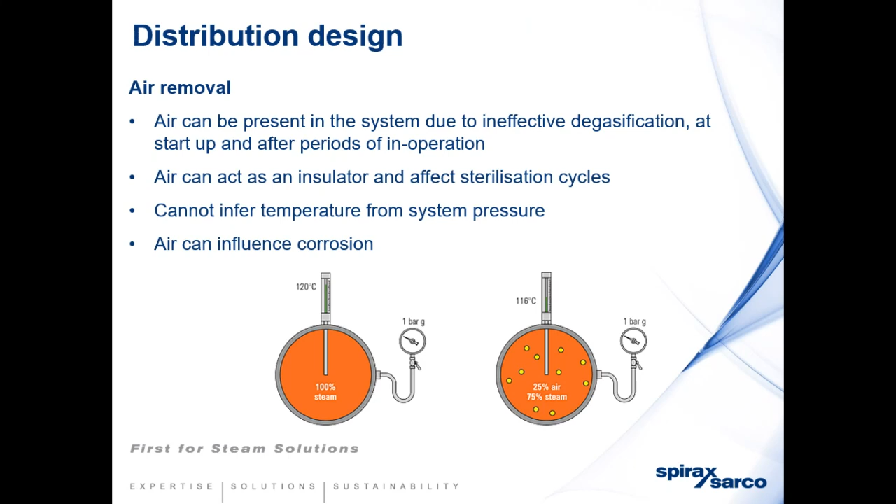Now there's also an illustration here of the difference that air in your system makes. In other words, 25% air will actually drop the temperature of your steam in your steam system, due to the fact that you don't have fully saturated steam covering the whole pipe. Therefore you will measure the right pressure, but the actual temperature of the steam running through the pipe will not be the correct saturated temperature due to the air sitting in your system.

Right, Francisco? Yes, the components that we spoke about earlier. You can just go through the various products. These are some of the products that we have available, just to give you an indication.

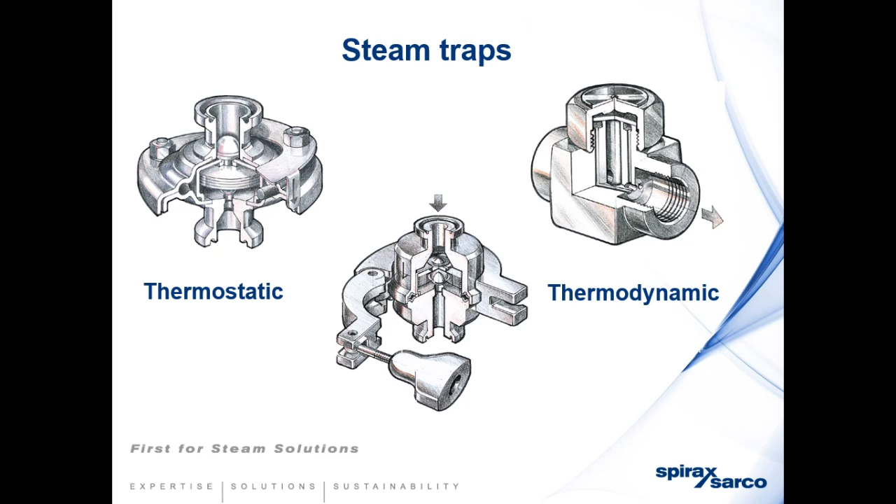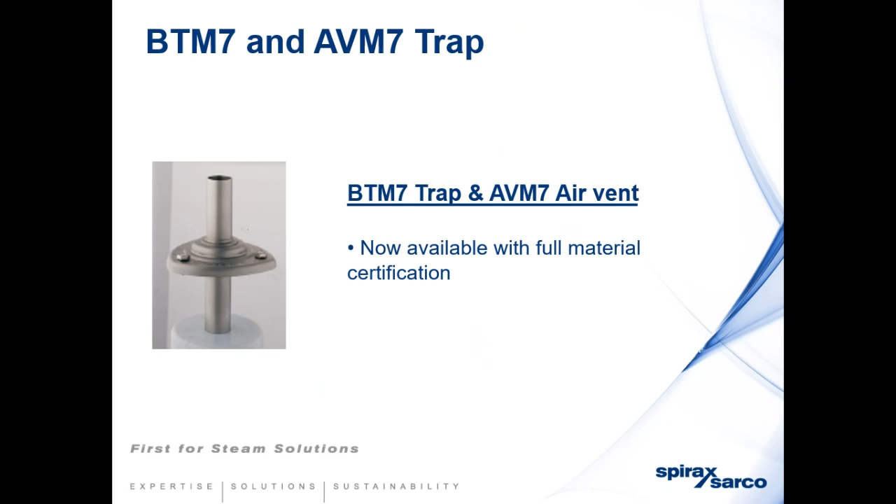If you look at all that, it's all nice and shiny. Most of those products are designed and manufactured to suit a clean steam system, actually all in 316 stainless steel, and have the certification requirements that one needs for your process line. So it gives you peace of mind that the piece of equipment you have purchased is safe for production of your process, and you have all the backing and certification required.

Just to add to that, Francisco, we must understand that depending on the quality of our insulation around the steam pipe, the steam does give off heat as it travels through the pipes, and condensation will take place. So you need to have the most saturated possible steam at the point of use to get heat exchange to the best ability that the system can offer, or the best quality of steam that you would need at the point of use.

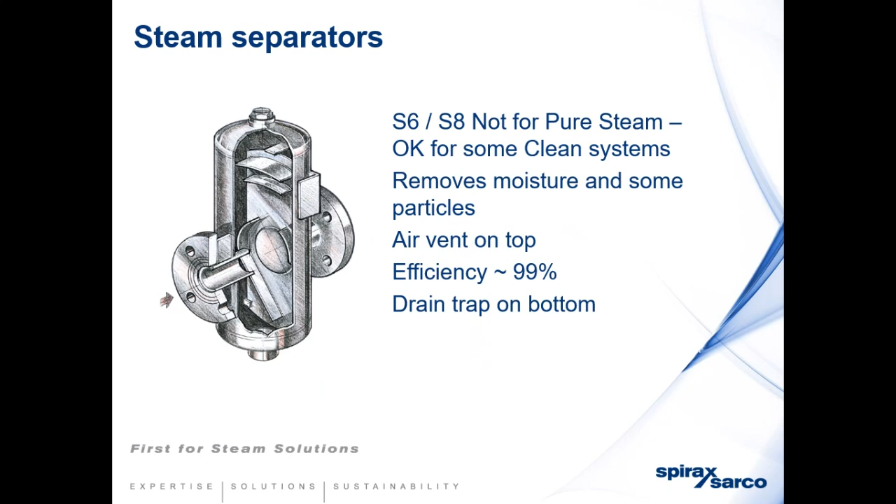The flow of the gas around it will push it past the pocket, because if it clings to the sides of the wall, it then needs a separator before the point of use to induce a centrifugal action and force upon the gas flowing, to get the solid particles dropped out by the separator. So it's quite critical to put a separator into your system, especially on a running system, because the pocket is mostly there for when you stop the system to drain it, so that you don't have excessive fluid sitting in your pipeline.

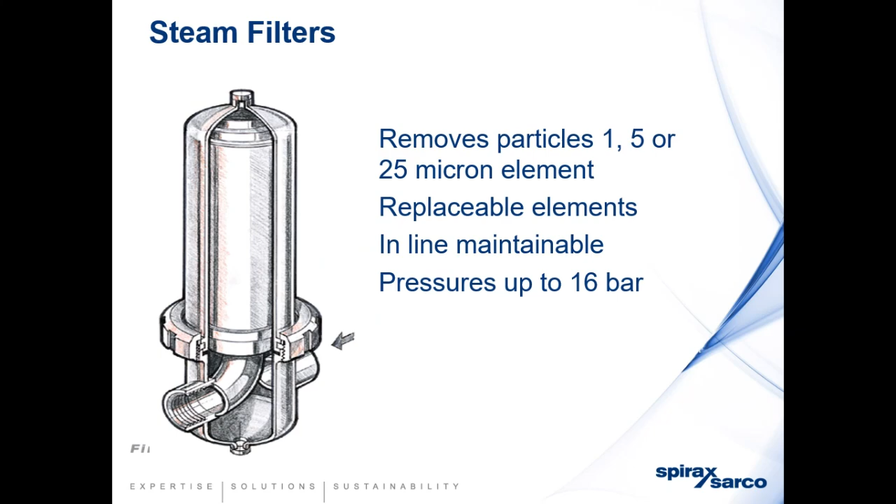This is what we're talking about, filters, and you can see on the top is where an air vent is, and the bottom is actually a trap. Just remember that you have to take the air vent and trap the actual condensate that's accumulated in the filter.

Steam generation. Sorry, we just have a question quickly. Yusuf, thank you for the question. The question is as follows: reverse osmosis filtration systems are quite expensive in relation to ultrafiltration systems. Are ultrafiltration systems suitable or sufficient to treat raw water being used to feed the boiler? Obviously, softeners will still need to be used.

Remember, when you talk about boiler, hopefully it's referring to the actual plant steam boiler. Even though a lot of people use ultrafiltration in boilers, that's more for energy saving, but you still add chemicals into the boiler to prevent oxygen issues, corrosion, or control pH. So you still have a dosing system. When it comes to reverse osmosis, the quality of water going into a clean steam generator has to match the table that I showed on the slide.

There are other methods you can use, not necessarily reverse osmosis, as long as you remove the chemical contents that need to be removed, and the purity of that water is equivalent to that table, then it's acceptable to go into a clean steam system. Remember, in a clean steam system, there are no added chemicals into a clean steam generator.

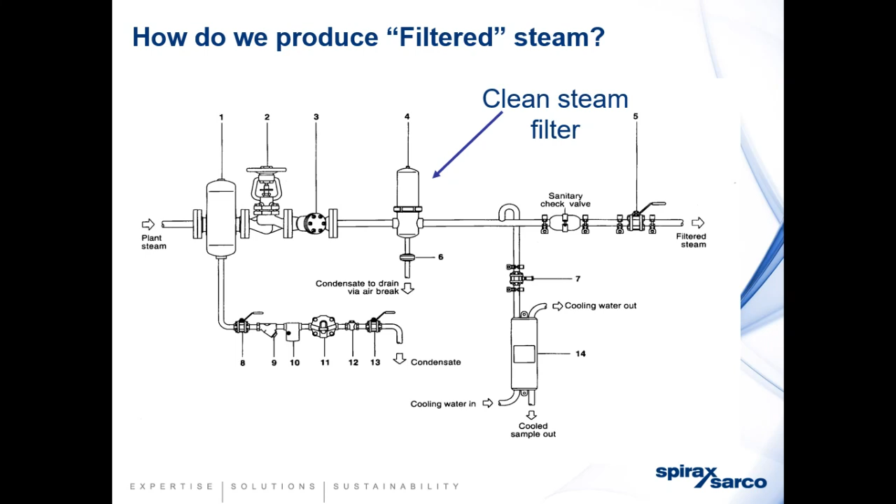Is there a risk? Yes, there is still a risk to the process. Individuals need to determine what the risk is. If you come to us for a solution that is actually risk-free, then the only one we could offer is the one on the next slide, which is what we call clean steam generation.

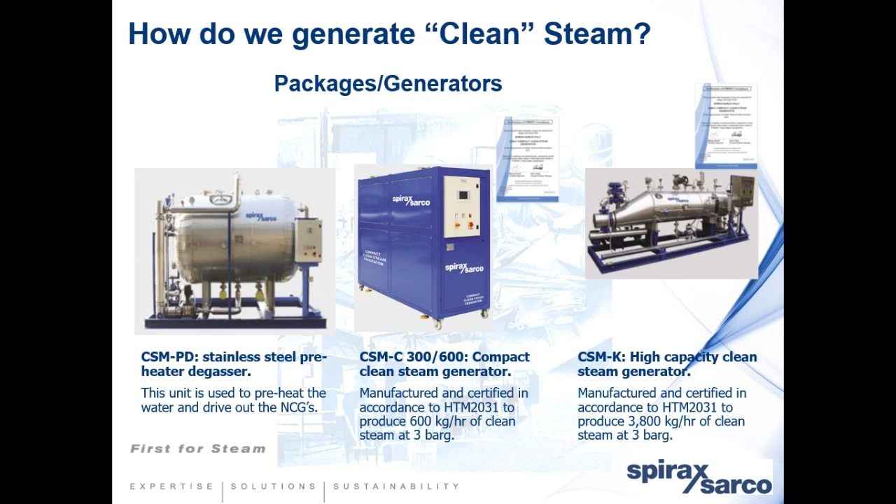These are some of the generators available. Some are custom made to suit the customer's requirements, but we normally do a feasibility study to understand the process, and then provide the best solution for the end user's system to make sure they get the best out of it.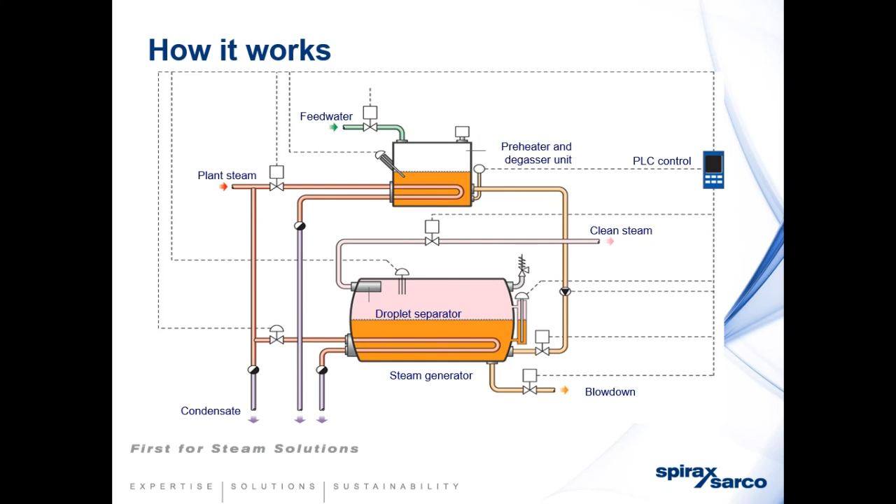Now, this is what you call a steam-to-steam generator. There are also what we call electric steam generators. So instead of plant, it's electric generators.

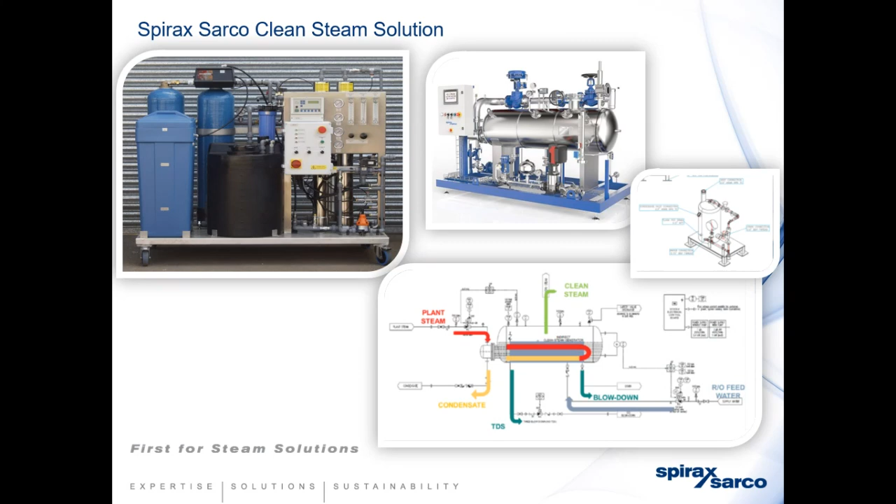Okay, this is what it actually is. It's reverse osmosis, as I explained to you. The picture you see on the top right-hand corner is the new clean steam generator manufactured by Spirax-Sarco, which has a patent on it and gives you the same indication and quality of steam that's required.

Now that full system is actually compliant with FDA standards. It complies with EN 285 and is also compliant with 1935/2004 EU regulation. So everything, all the compliance requirements you need to make sure the system is food safe, that generator carries that certification.

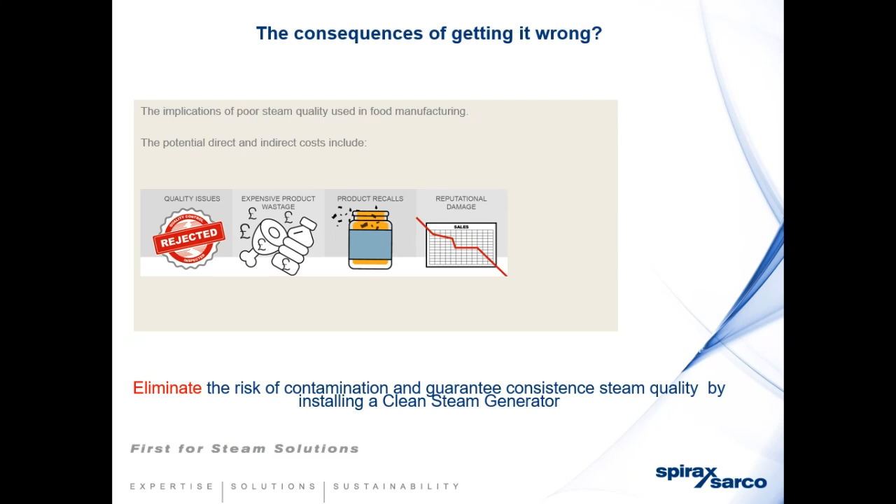That's a very good document to have. I always like to highlight this: let's not wait for circumstances to happen, let's not wait for a product recall, let's not wait for something to happen. There has been a company I know of that had reputational damage because of contamination in their process, and they had to even sell the actual company and rebrand the same product with a different name brand. The only way to look at that is obviously Clean Steam would give you that peace of mind that those circumstances will not occur.

Here's some examples for you. Here's a brewing company which uses it for sterilizing. They use sterile air filters, and they use Clean Steam to sterilize the filters, and also use it on the barrels. This particular one uses beer barrels. They sterilize the barrels with Clean Steam to make sure that if there's any smell or taste from the steam, it will not appear on the barrels.

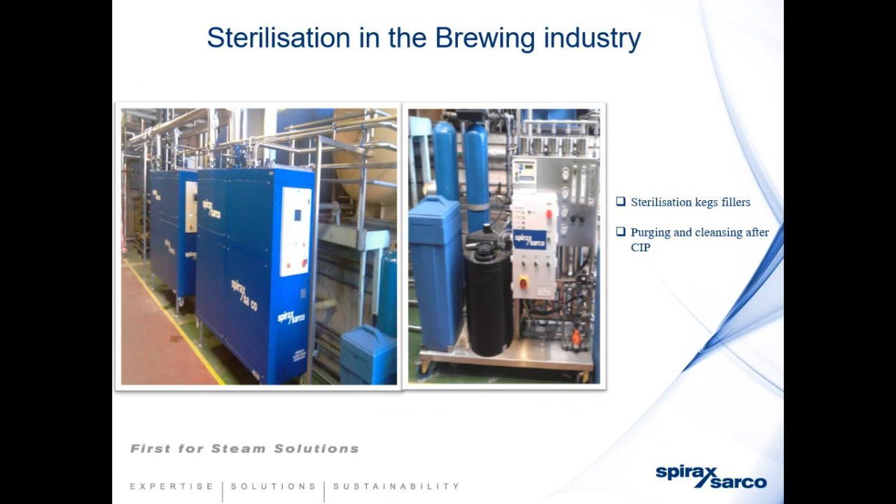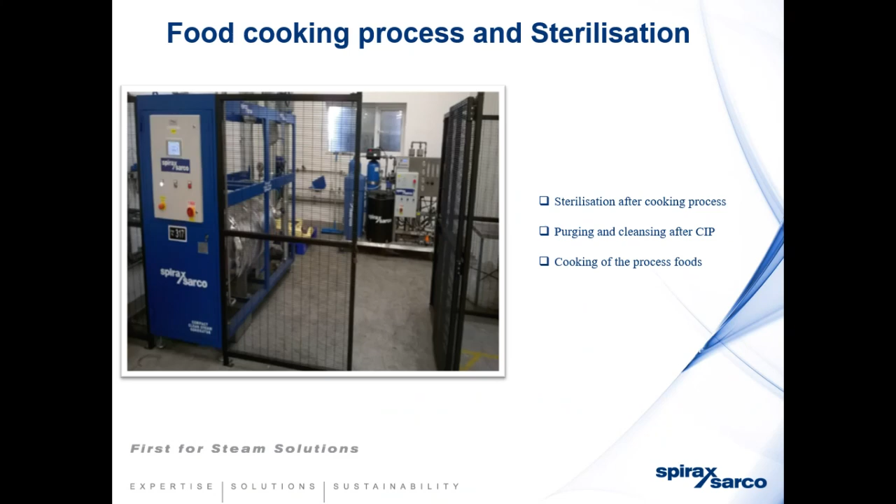And there is a case study towards the end about a company that was prepared to give us some feedback on the Clean Steam generator. They also use it for CIP. What happens with CIP is a lot of companies purge with treated water, but they found that treated water doesn't get into all the crevices and dead legs. So they found that purging with steam gets into those crevices and dead legs, which they weren't getting before, so it helps them quite a lot in making sure that after CIP, it is safe.

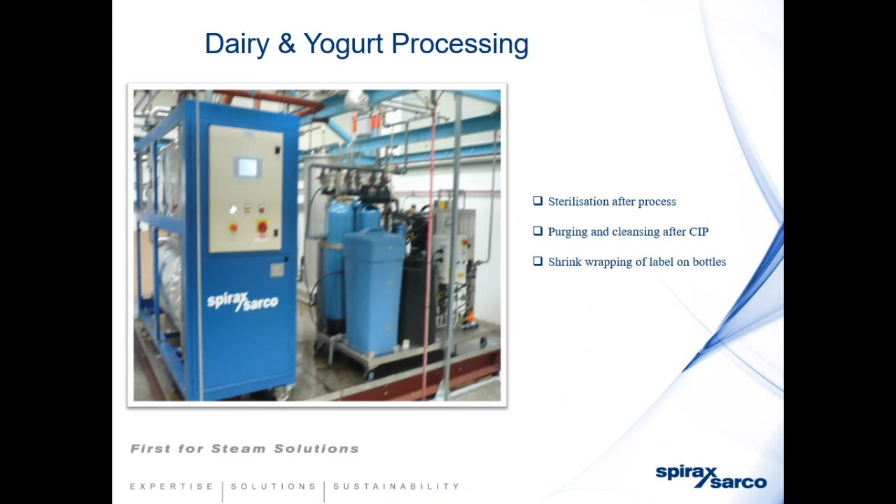You can see by the processes as you go along, a lot of them are sterilizing, a lot are purging, a lot are used for sterilizing the caps before going onto the bottles. You can see, for example, you can tell which company that is - they use it for cap sterilization, and for sterilizing the straws before going into the actual sachets.

One interesting case involves activated carbon filters. They found that using backwashing on the activated carbon filter, there were still bacteria causing problems. And this bacteria, the only way they could get rid of it was through steam sterilization.

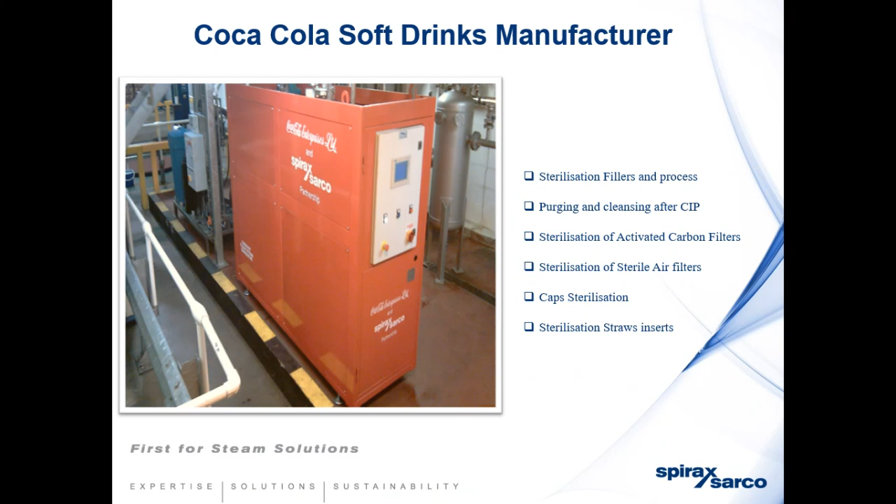It's something you need to look at if you are using activated carbon filters. A lot of companies use activated carbon filters to remove the chlorine smell and taste from the water. If you are using it, it's worthwhile looking at your process, because Clean Steam is what we highly recommend to overcome those issues.

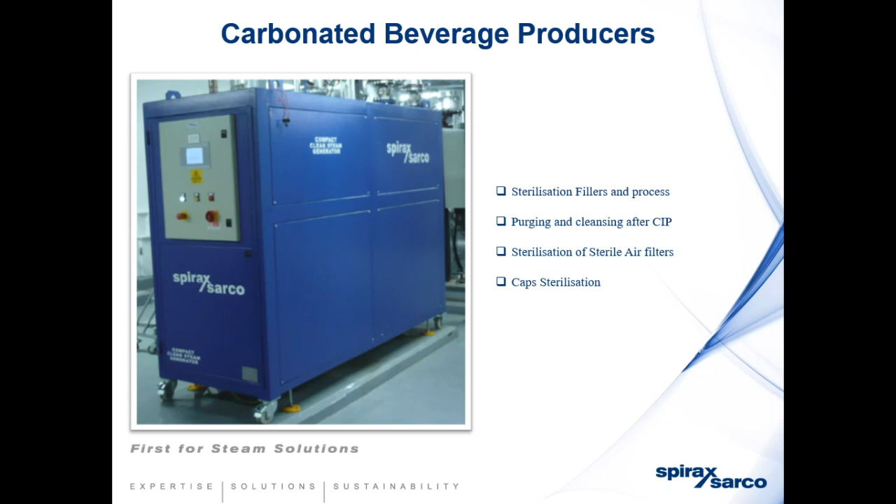There are lots of companies that, once they understand steam is directly in contact and considered an ingredient, take measures to ensure contamination cannot occur. This particular plant room design was done by Spirax-Sarco in conjunction with EC 1935-2004. Every steam contact part on this generator has that certification, in full conformance with EC 1935. We can design the system to suit your requirements, whatever the legislation requires, to ensure we comply.

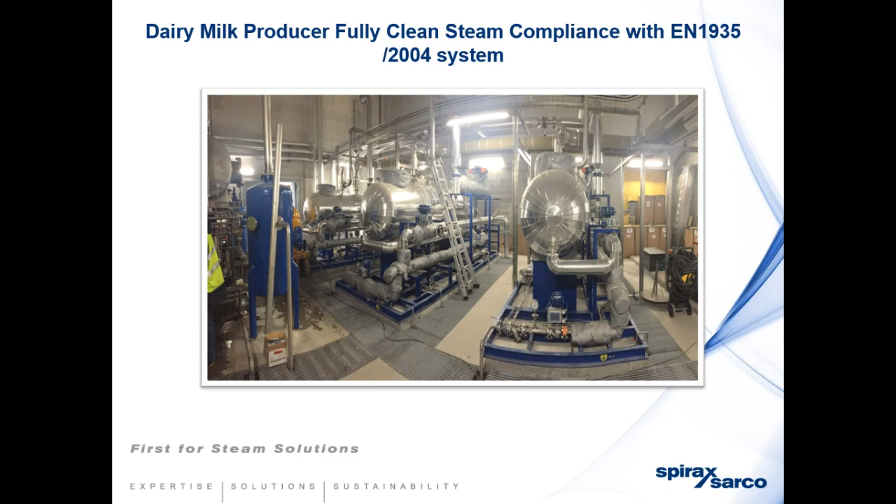I'm sure you're familiar with the bottling of Guinness, and it clearly shows that before they were using what they call plant steam or black steam, they were getting inconsistent taste differences in the beer manufacturing. But since changing over to clean steam, their beer taste has been perfected and consistent every time they manufacture. It's interesting to see the difference clean steam can make to your process. Now one has to decide whether to convert to clean steam or not.

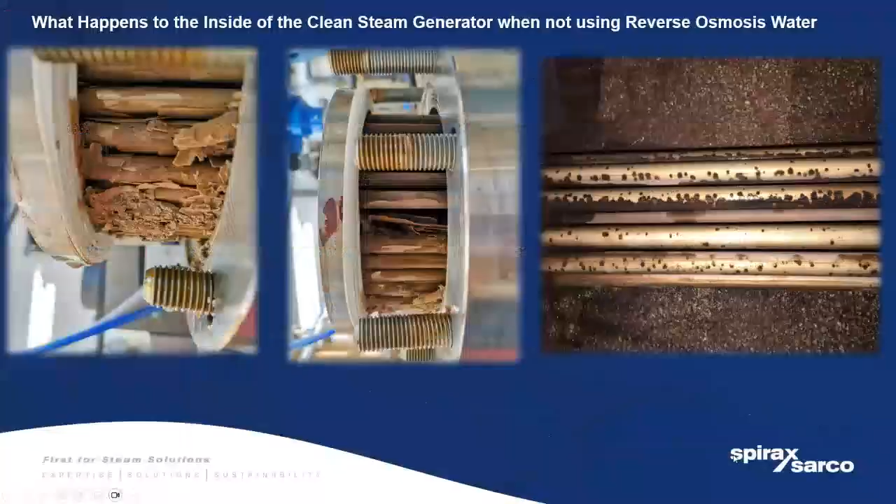This is what happens when we talk about chemical-free water going into a particular generator. This client wanted to use just normal softened water into the clean steam generator. Within a matter of months, this is what actually happened. This is why we are very particular about giving you the measures or quality of water required in a clean steam system. If you do not use the quality of water we recommend, this can occur, as you can see on the slide. Just thought I'd share that as information.